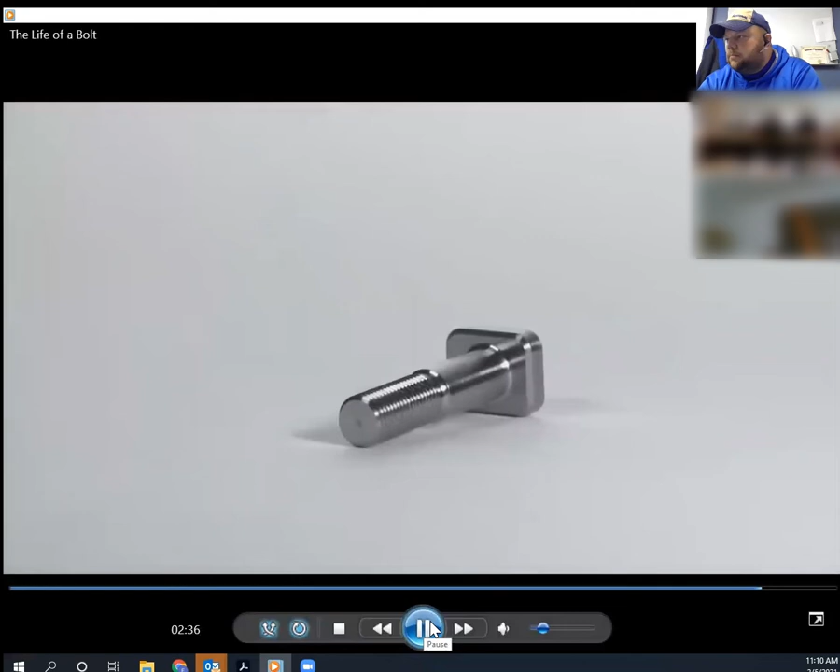What'd you think? Kind of a neat little video? Yes? Shake heads, yes, and yes, no, maybe. Don't want to see it again?

So one of the things I wanted to do was walk you through this, because this is exactly what our shop does. It's more than just an assembly line. We do a lot of different parts and a lot of custom orders, from small piece orders to large piece orders. We're considered a job shop.

So here in this part of the video, we are drawing the conception of that part, and then we're putting it into a CAD model. So we have a CAD department.

The first step in getting an order at Fastenal Manufacturing for our customers is to work with our store, and then our store calls our sales folks. We've got a team of sales folks in the office, and what they do is put together the order. They find out the information from the customer: how many parts are they looking for, is there a certain material they want the part made out of, is there a certain grade or specification?

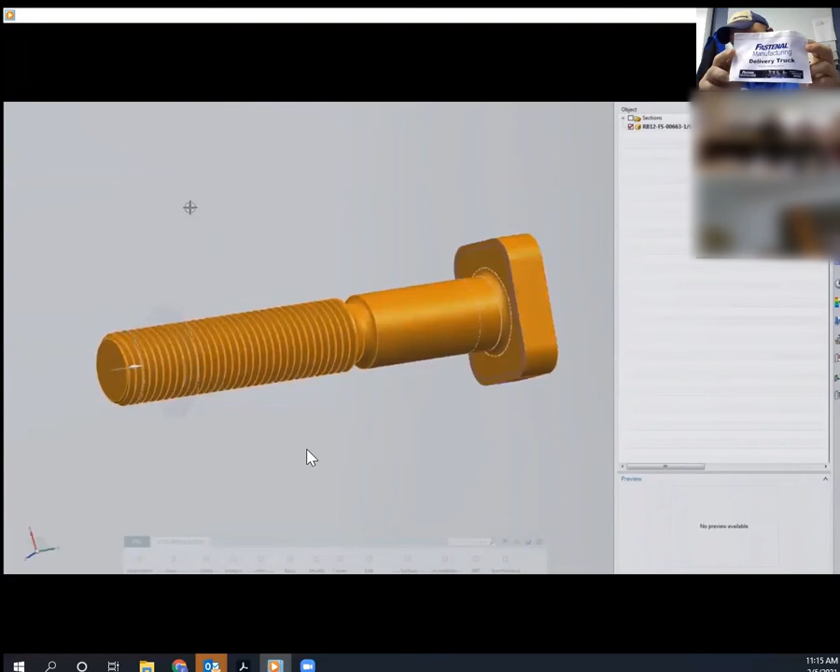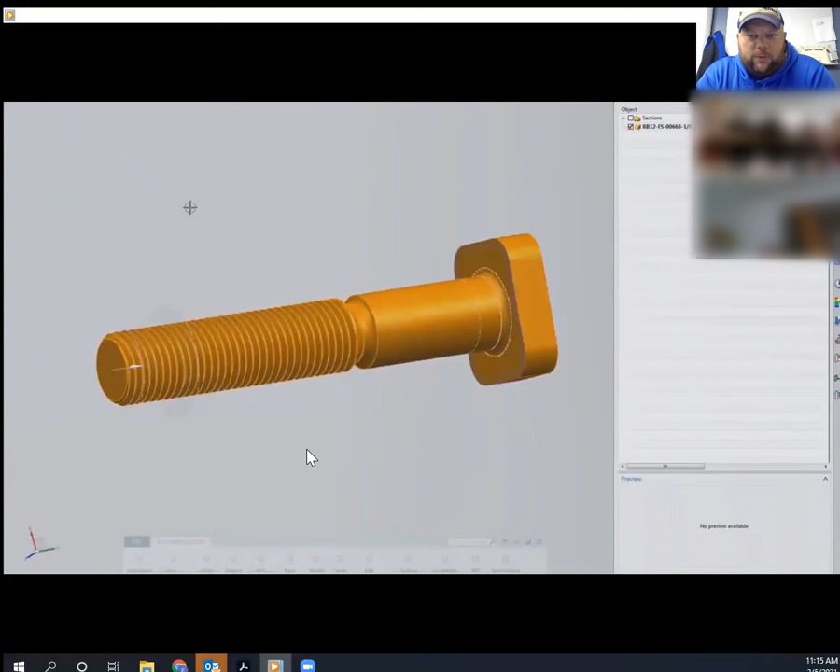And then what we do is we put together a set of instructions. If you've ever played with Legos before and gotten a set of instructions of how to put that together, essentially what you're looking at is really a blueprint. All a blueprint is, is a drawing or a set of standardized instructions that would allow anybody to put the part together. So that's what our machinists work off of in the shop - that CAD drawing. As long as you know how to interpret and read those drawings, if it conforms to that drawing, that part should be exactly what the customer wants. So that's the first step.

So I'm going to hit play here and let this play a little bit more.

Obviously they're doing some CAD work and some model work on the screen there. And after that's done, it's going to go out to their production team. And that's what we do.

We print it. They're selecting the material here. Our material comes in from all sorts of different vendors, get it to the machinist, and then they're going to set up the machine. So he's writing a program with a CNC machine.

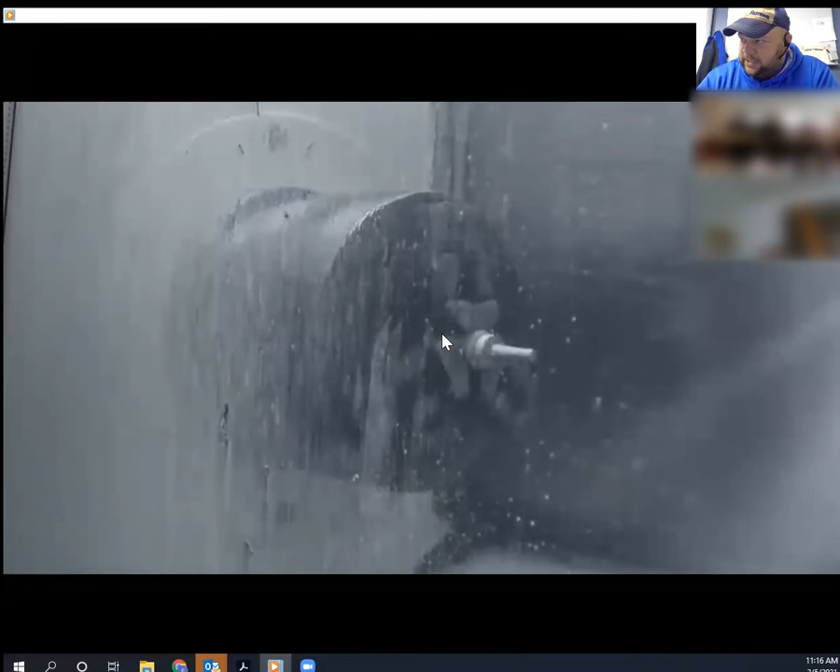This is actually a turning center. The way you know the difference between a turning center and a mill is a turning center will rotate the material. So in this part, if we go back just a little bit, let me see if I can pause it. You can see there that this chuck is turning and that material is turning, and the tool comes and cuts it. If we go back even further, you can see that tool come in there, right there. So this is a tool, it's going to come down and cut it. So the tool is stationary while the material turns.

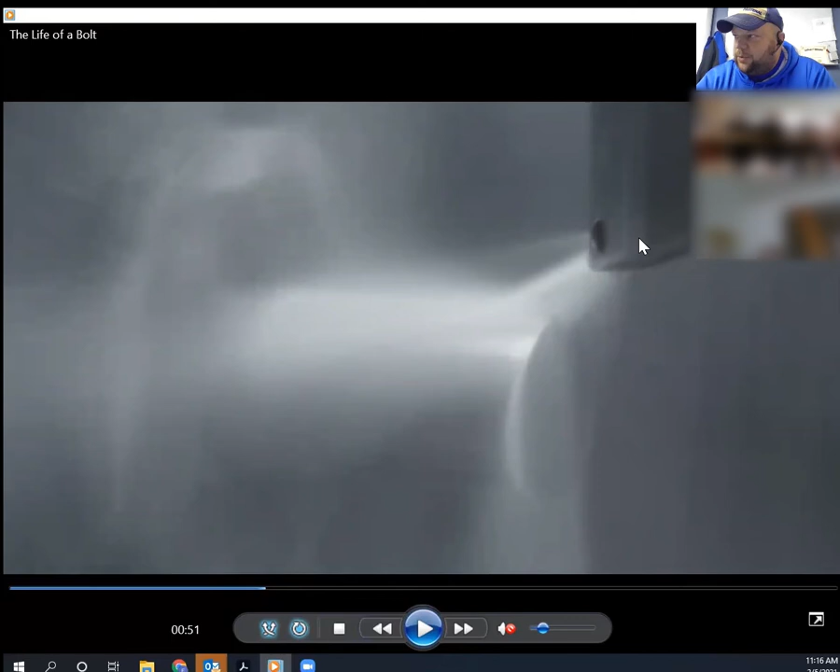In a mill, it's a little bit different, kind of the opposite. The tool is actually rotating, and then the material moves because it's clamped into a movable vise that has an X and a Y axis. You can get more axes on mills, so you can get as technical as you want, up to 5, 6 axes.

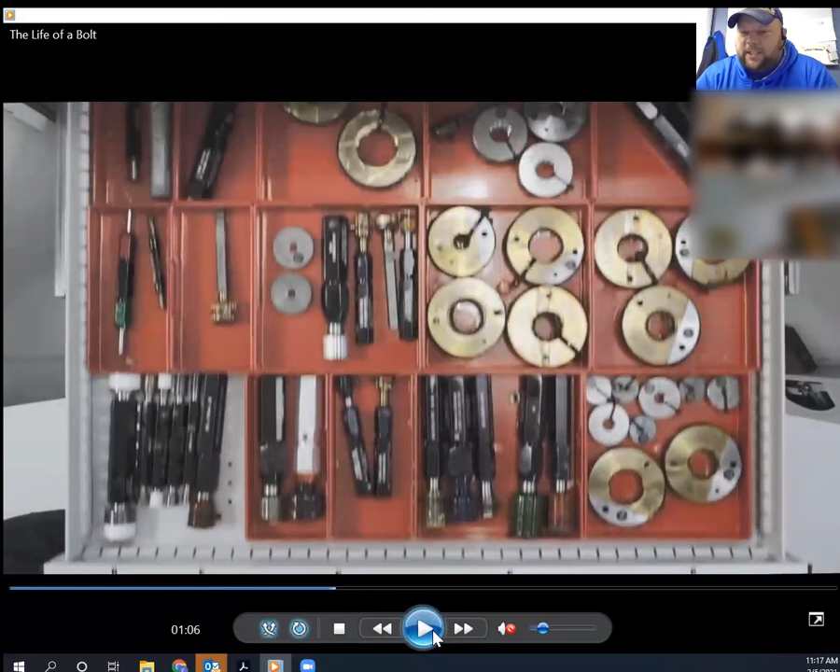Here, he's opening a drawer. He's got a drawer full of gauges, and he's making sure that that part is going to conform. Threads are actually one of the most technical things that we do, and it's a little bit tough sometimes to get all the dimensions and components of a thread to work correctly. So the best way to check it would be to use a ring gauge like this. This is a gauge that would spin on, and usually they're in a set - there's one that will go on and one that will not go on. It's called a no-go or a go gauge, and they come in pairs. Then we'll use stuff like that along with calipers and micrometers and things like that. But our machinists are what does that.

The person that's actually creating the program, working from the blueprint, they power up the CNC, they program it, they put in the tooling that's required, they turn the parts out, and then they're inspecting the parts on the backside as well.

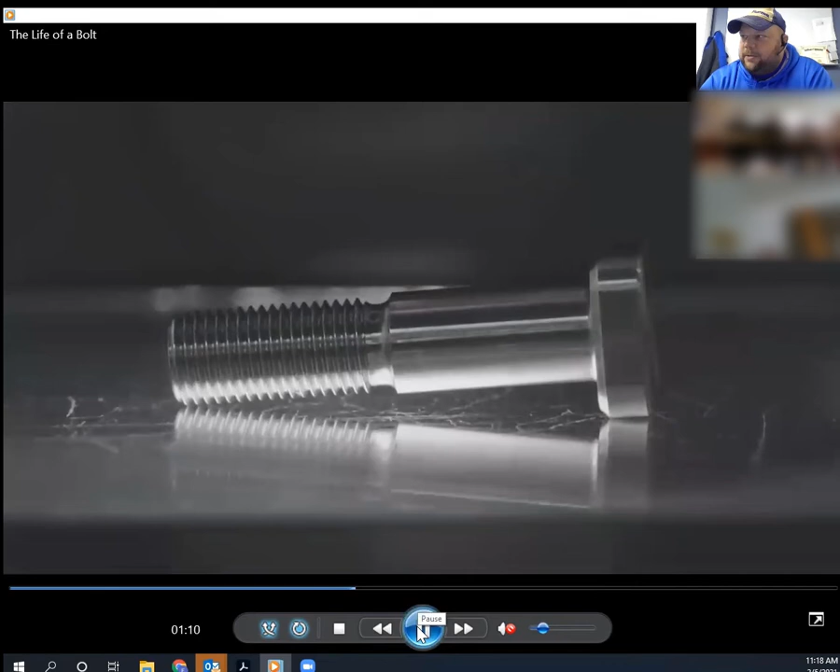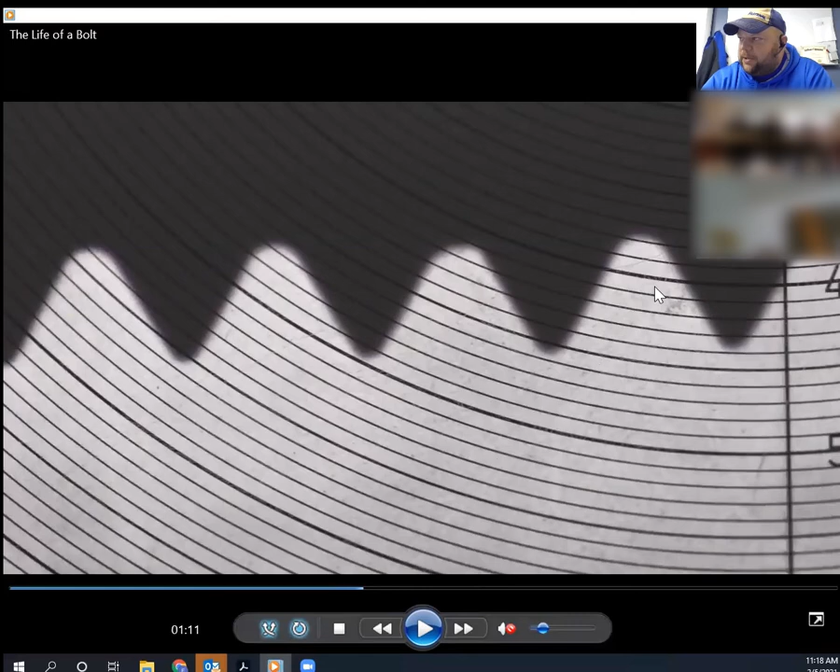This is an optical comparator. This is kind of a neat tool - we've got several of these in the shop where you can actually zoom in and see features, and you can use this to measure. So this line here and this line here, it looks like they're about 5/1000ths apart. You can actually line up those lines and measure radiuses and things like that.

Now he's doing a hardness test. We have an A2LA accredited lab here in our shop. It's not actually part of Fastenal manufacturing, but it is a part of Fastenal, part of Fastenal's quality division. The nice thing about that is that they give us a little bit of separation from manufacturing to our testing facility, and we can use our own lab as a third-party test.

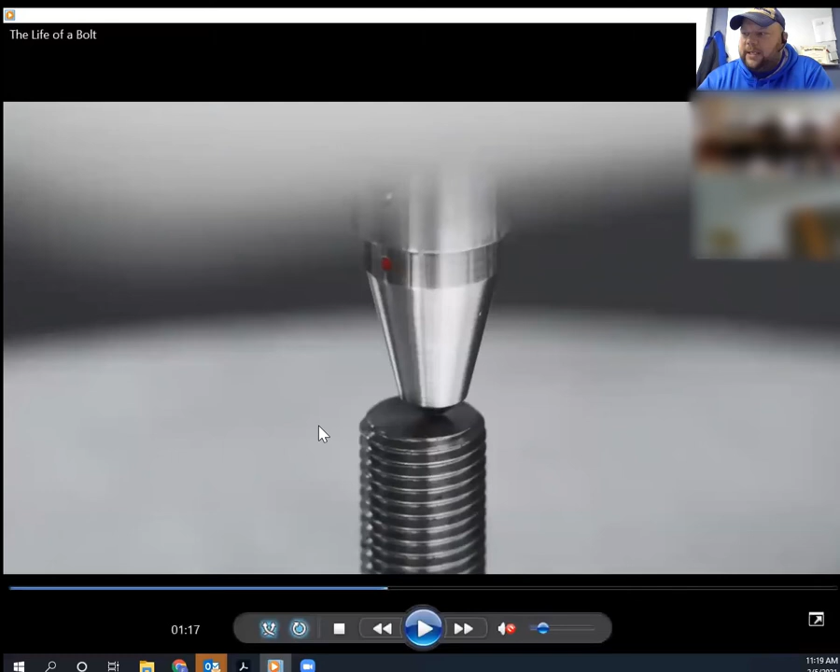Meaning the folks in the lab report to somebody different than manufacturing, and the reason we want a third-party test is so there's no question that me, as a machinist, I can't just say make it pass, just write it in. You want somebody in there that's truly a third party, and by having those folks in-house and this testing ability in-house, it saves our customers a lot of lead time. We don't have to ship the parts out to get them tested.

This is a liquid penetrant test here. So what he's doing is he's putting a fluorescent liquid on there, submersing the part in there, looking for any cracks. Once you look at that under a black light, if there were any cracks, that liquid would have seeped into those cracks. I don't know if this is intended to be a crack right here - can you see where my arrow is? But those types of things show up. I don't know if that's just a reflection from the camera or if it's actually a crack, because I see this is actually the dye here in the thread there, and it's a little bit brighter.

So it might not be an actual crack, but that's kind of what it would look like under that black light. A lot of times you can't see those minute cracks with your bare eyes, so he's checking that over, making sure it's good. Obviously, if we're putting this on a race car, holding the suspension together or the front end linkage together, we don't want that part to crack or break.

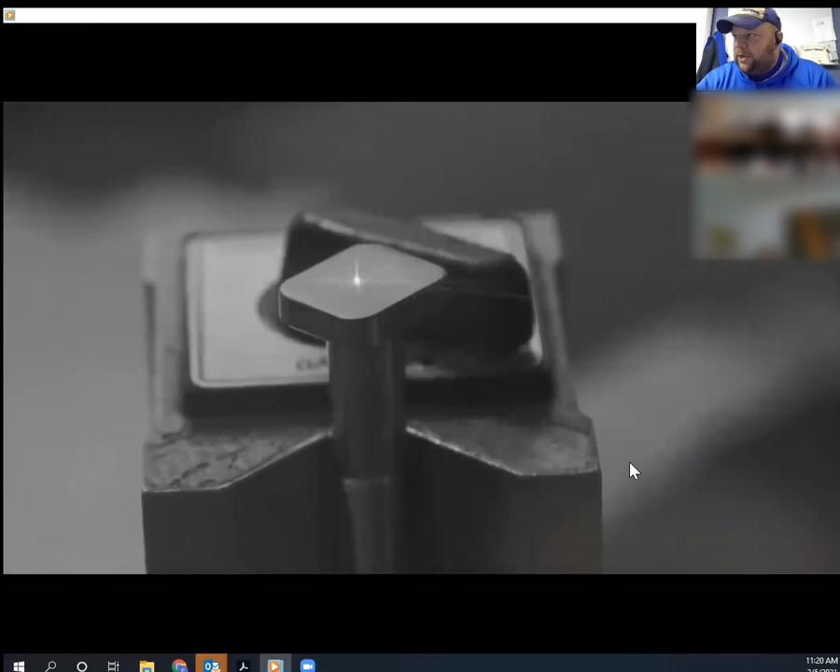They're doing a laser etch on it. It's just a serialization, they want to put their number on it. We've got those capabilities, we will serialize and stamp and mark our parts if a customer is looking for them. Sometimes we provide full on traceability for most of our parts. We actually do provide that.

Depends on how far they want to go. If they actually want that traceability and a serialized number on the part, we can even tell what part of the run that part was run in.

So anyway, that's kind of our machinists at the end of the order. They'll box up those parts, put a sticker on them, a shipping sticker, and get them out to our shipping department. A lot of times from start to finish, it's one person doing that job.

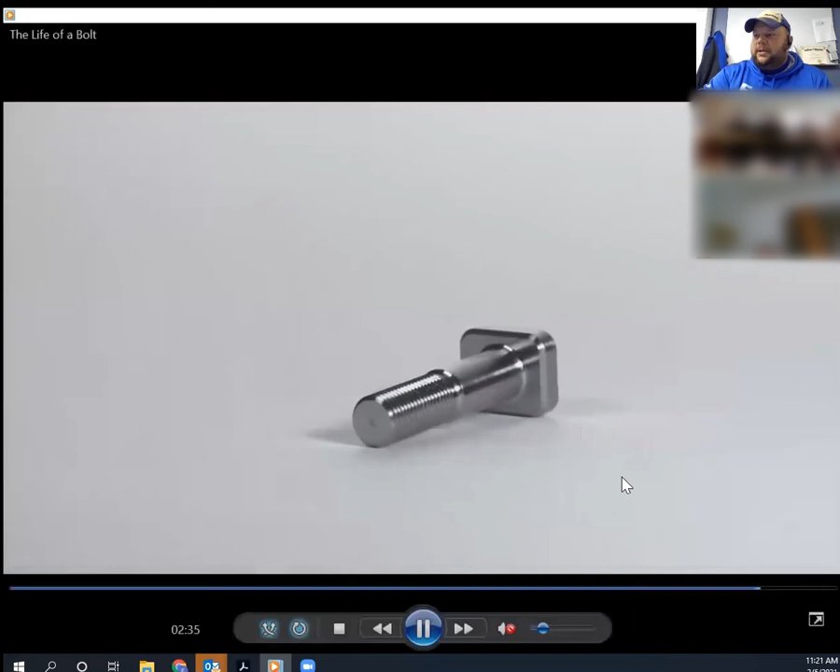As you can kind of tell, what I was saying is it's not the same type of assembly line job. It's very different from day to day.

If you're working on a 5-piece order or a 25-piece order, sometimes it might take you an hour and a half or 2 hours to set up a CNC machine with a program and put the tooling in to run that part. But then when it's all up and running, for 25 pieces, maybe that only takes 45 minutes or an hour. So if you come in on an 8-hour shift, there's a good chance you might work yourself through 3 or 4 different parts.

And it's not doing the same thing over and over again for each part. You've got to pick it up and program it and go from there.

About 50% of our work is repeat work, so we do save CNC programs to save time that way. If we've run it before, we'll be able to pull in a past program and get that up and running.

So are there any questions at this point? I've kind of been talking for 20 minutes or so. Any questions that you guys have about what you saw in the video? Nothing? Okay.

So any of you, just by a show of hands or a nod, is there anybody interested in a career like this? Does this sound like it's hands-on enough and something that would be kind of cool to explore? Yes, no, maybe? Okay, I can't see the whole class over there, but...